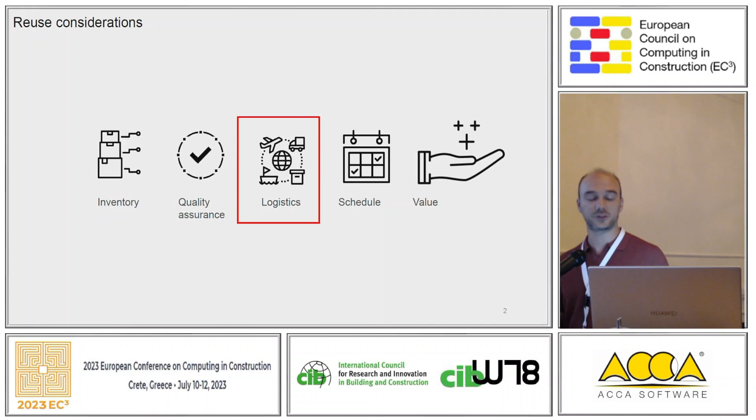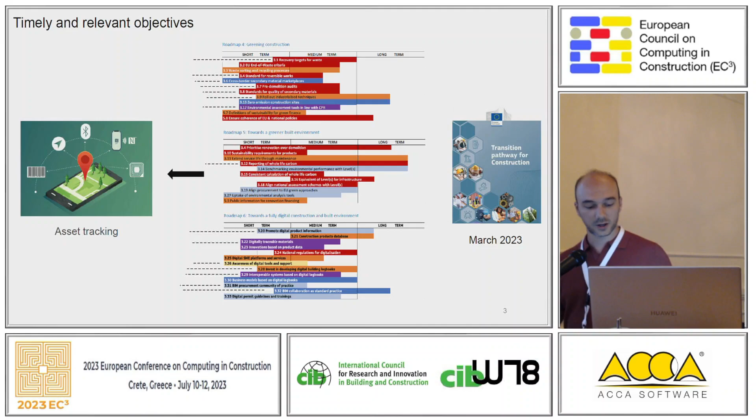The focus of this presentation will be on logistics, but there are many other aspects to consider when it comes to reuse of buildings. This is also a timely and relevant objective relating to the transition pathway for construction from the European Commission, regarding environmental assessment of buildings, digital product passports, and traceability of where these elements come from, since there are a lot of policies aiming to enable reuse.

When it comes to reuse, we also need both tracking and tracing. Tracking usually refers to knowing the type and number of elements, where they are located, and when they will become available. Tracing is important to know information on previous life cycles, the ownership and lifespan of materials, and specifically regarding concrete, the condition of panels and the location history, which can be useful for some LCA modules.

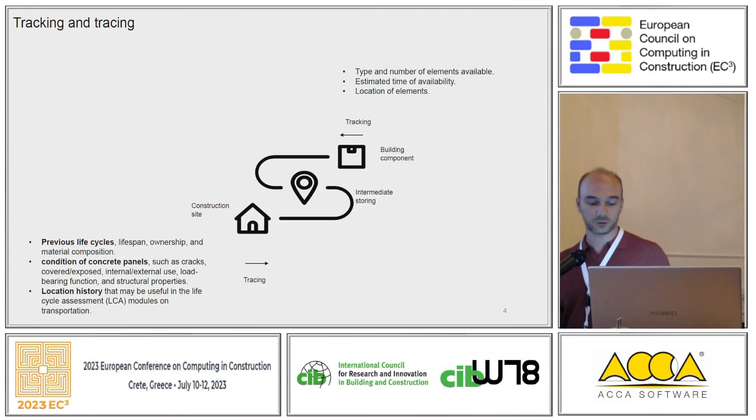Usually companies don't have a model-based approach towards tracking, but they have some internal processes which they use and which need to comply at the country or European level. So they have some identification number, and they mainly use an internal database or existing tools like a spreadsheet or other tools which can be shared or used for collaboration.

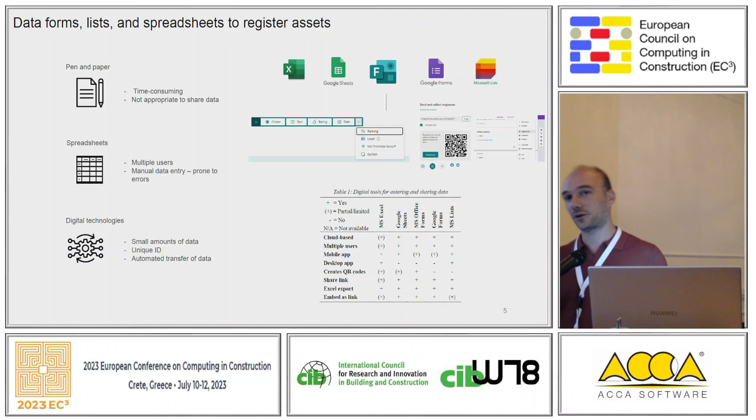This is prone to error because it's not an automatic identification through the database. If we integrate and use digital technologies with a database, we can automatically identify the element in the database, and also use a small transfer of data either in the tag itself or in the database. So the tag can also be used to store some information.

There's a wide range of technologies. The simple one that used to be used, also in these Swedish buildings in the 1960s, is a stamp or a metal plate, which is still in place today and still readable. There's a lot of other technologies like Bluetooth or RFID, radio frequency identification. The difference between passive and active is in the use of batteries, and also the range changes.

Then there's near field communication, which is a subset of RFID. This has not yet been used for tracking elements. There's QR codes, with some work going on either on blockchain or for placing it on elements. And there's barcodes, which is the most simple. QR codes can also be static or dynamic.

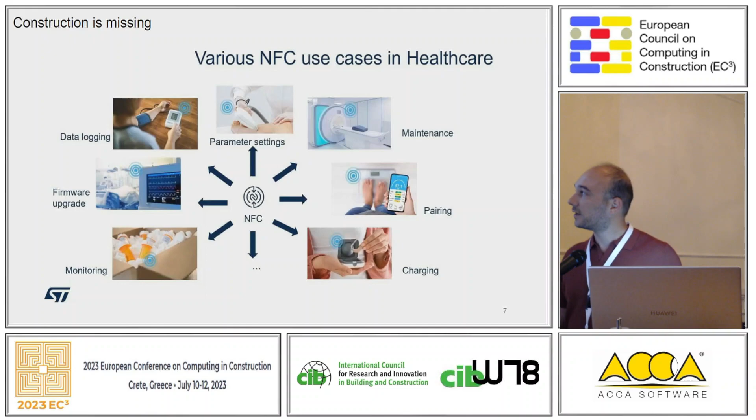The use in construction has mainly focused on using RFID in new construction or for prefabrication. NFC, which is a subset of RFID and also provides secure communication and transactions, can be easily found in credit cards and so on, but this has not yet been applied to elements. So this is something that we're looking at.

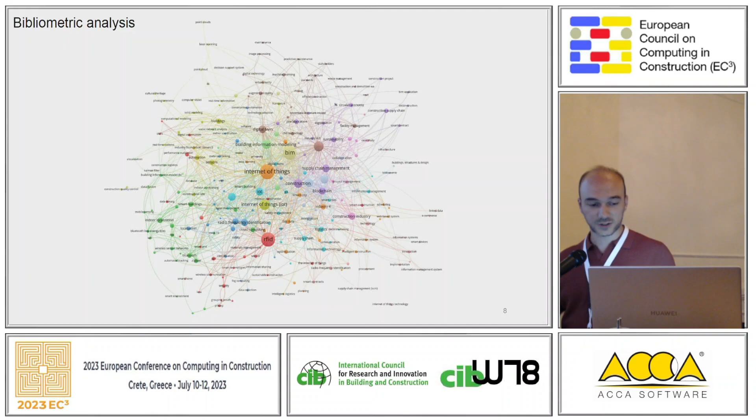From a bibliometric analysis, we can clearly see that the focus has been on keywords like RFID, or the full term radio frequency identification, Internet of Things, blockchain, supply chain, while these other technologies are missing or don't come up in this high-level analysis.

Maybe you're familiar with RFID, but very briefly it consists of three components: a transponder, the tag; a transceiver, the reader; and antennas. It also requires a software application and equipment, so it cannot be used with mobile phones. It can also read automatically a lot of elements at the same time.

Briefly, to show how RFID works, it can be a printed tag or laminated tag to protect it from weathering, or encapsulated tags. These are most commonly used in concrete, for example, because it's in an alkaline environment which would damage it, and this is mainly used to protect the tag.

As I said before, the focus has been on new prefabricated construction, for example in the Hong Kong Housing Authority and researchers, and there's several papers since 2015 in Automation in Construction, mainly focused on RFID and how they're using RFID on this topic.

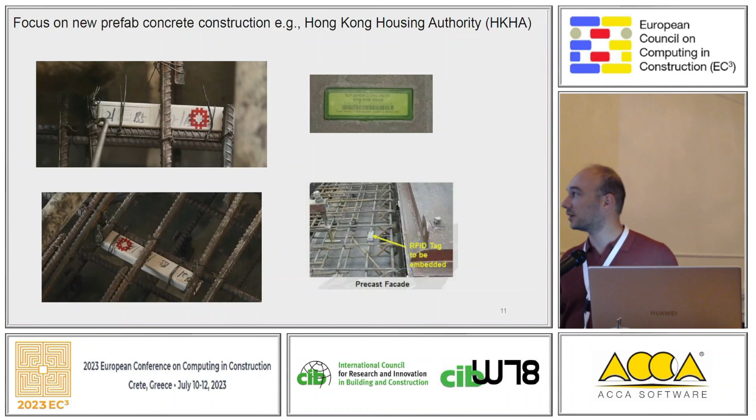There's also some very new interesting developments in Bluetooth that we explored in this paper. Although these are not yet adapted to construction, they could be used because they would enable a decentralized use and sharing of this material and elements, not structural, but also structural, and for tracking them using mobile phones without using antennas.

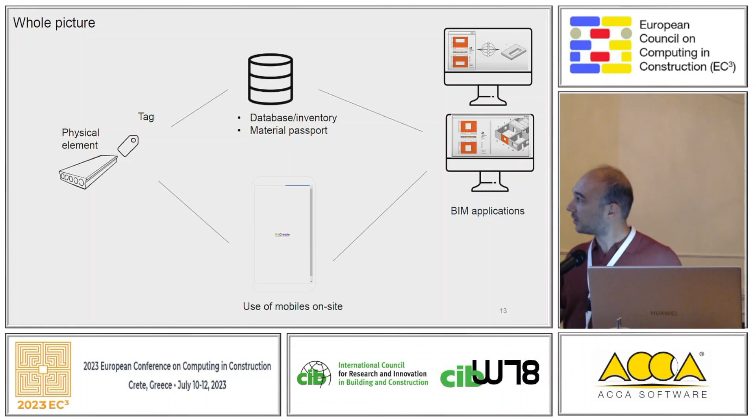So the whole idea of this initial work we are presenting in the paper is to have the physical element before deconstruction, or at some point put it in a database and use of mobile phones, and also link it to a BIM application.

So the first question, which has not been seen in other research, is that they mainly use it on new construction and then the building is there. While in this case it's how do we align which technology applies to which life cycle, because the sides of the panels, once the building is constructed, are not more visible.

The surface is visible when the element is constructed. Then when it gets deconstructed, these elements are again stacked, so the surface is not yet visible. And then they get, again, reassembled into a new structure. These are images from the construction pilot.

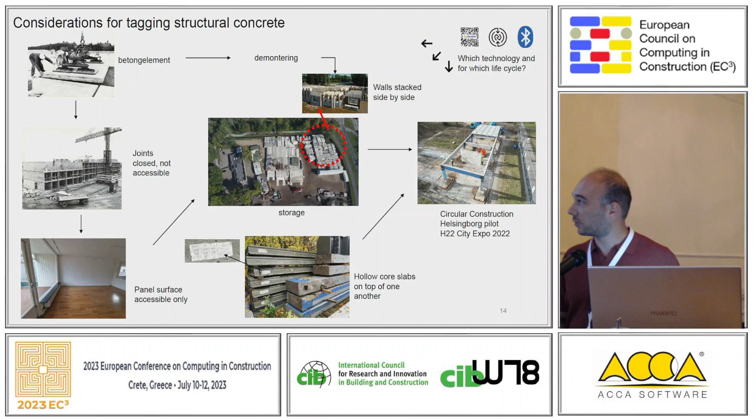So in the paper, we propose a new digital workflow. We are using a face-based Revit family to model the tag and put it in a template or in the model. There are two ways: it could be either model the tag or as a property on the BIM model.

This is a choice, and we are not suggesting one is better than the other, but of course if you have a specific condition from the use or from the existing condition, then we need a more precise location where that element is, either in the type of the panel or in the condition.

And then we place an NFC, the near field communication, and a Bluetooth tag together or separately on the surface of the panel. Then when these are stacked, a QR code could be attached to have this identification.

And then when the elements are reassembled, the higher cost Bluetooth could be recovered, and the NFC could be left for life cycle tracking to have in the existing condition, and also to share information with users to know sustainability aspects of their own building.

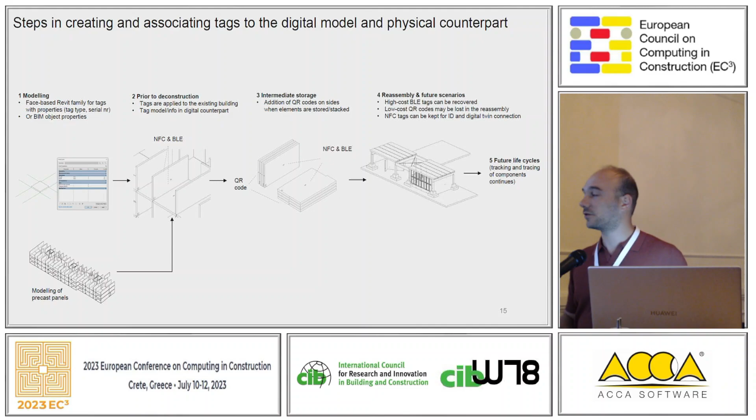But this would also require a role-based access to levels of information: what can be seen publicly, what can be seen by users, and what can be edited.

So the integration mainly explores these three technologies, QR codes, Bluetooth, and NFC, through the use of mobile devices, storing a database which has an image, a location, and the identification of these tags, and also perhaps using a 3D model like Speckle with annotations that we need on the site, or store them directly on the database, and also transfer this information into the BIM model.

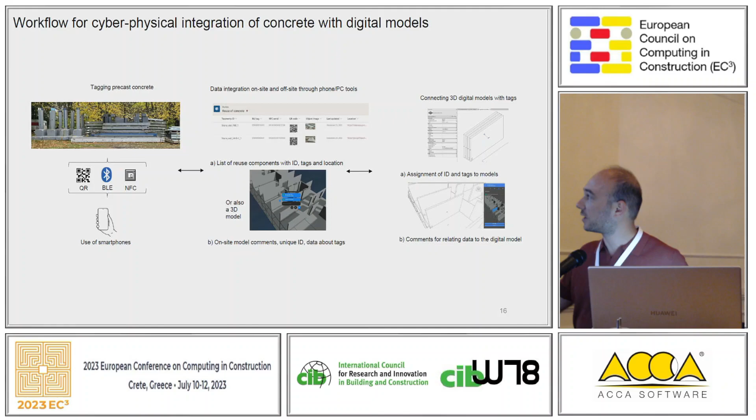There are different element IDs that come into play, and there's the Revit element ID, for example. Each BIM tool has its own, IFC GUID, or there's the global trade item number system, and there's the digital product passport, which is being defined and developed.

So every ID plays its own role, but there's also one ID that we have proposed and developed to track elements, independent from this, or it could be related to this. This is something to be discussed further, because a lot of things are being developed currently.

And why do we need a model-based approach instead of drawings? A lot of companies still use existing drawings today to tag the elements or the materials, while we are moving more towards a model-based construction or deconstruction.

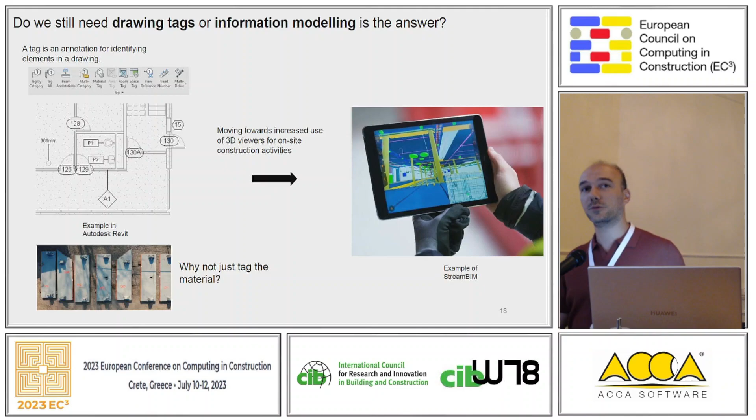So it makes sense to have these elements placed in a digital model and be able to also have this integration of tags in the model.

So we did some laboratory examples to test these technologies. We did some core drills at different depths where we placed an NFC tag, simple NFC tags that can be bought on Amazon, and also sized correctly to place a Chipolo Bluetooth tag. As you can see, also pouring concrete without rugging the NFC, and we had some very positive results.

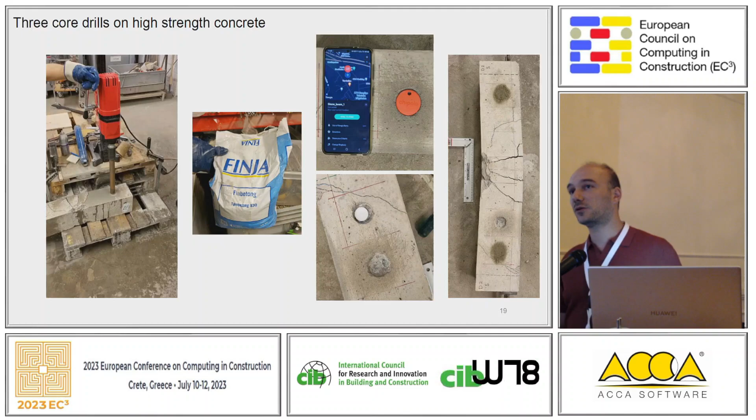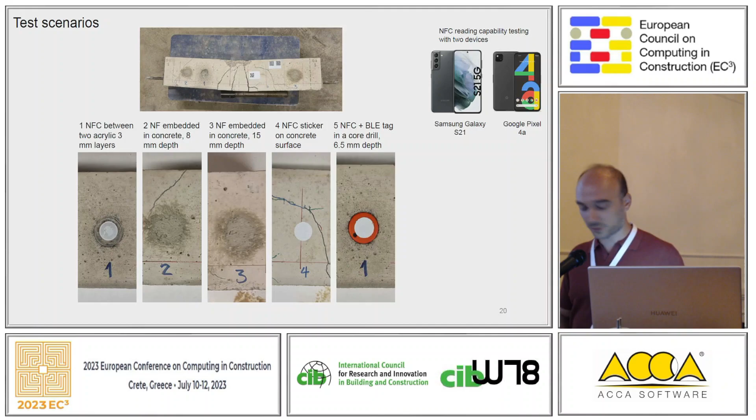Even without rugging, the NFC was readable. These are the 5 scenarios that we tested: encapsulating the NFC between 2 acrylic 3 mm layers, pouring a high strength concrete at 2 different depths, just placing the NFC on the concrete surface, or combining the NFC with the Bluetooth. We tested it with the 2 devices' reading capabilities.

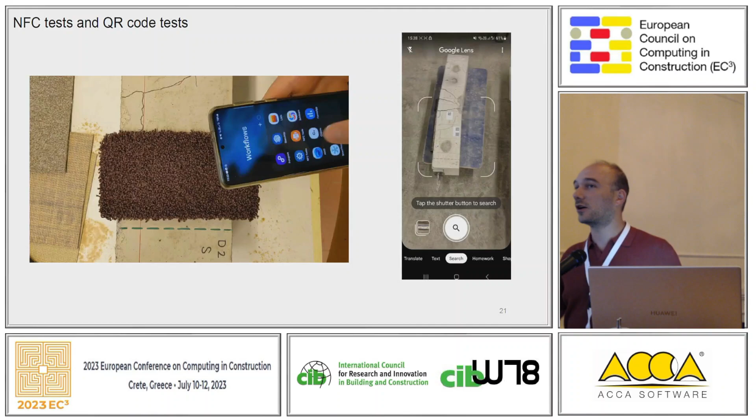This video will show the reading capability for the NFC through different architectural surfaces, because the concrete is not the final surface, and also testing of the QR codes, which should forward to a web page.

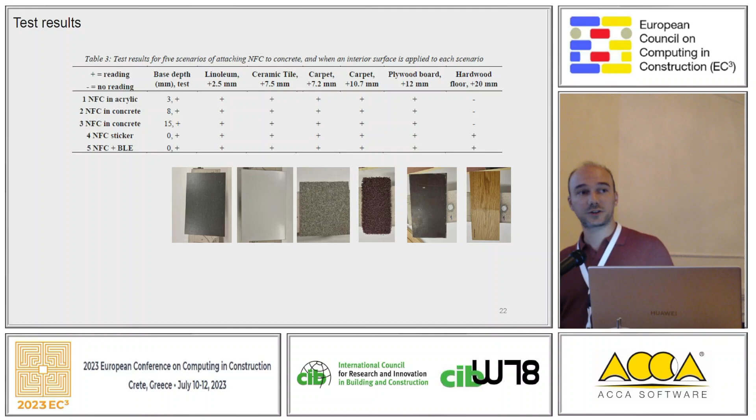These are the test results of different architectural surfaces. The first column reports the base depth where the NFC is placed, and the other columns report the different surfaces: carpets, wall surfaces like linoleum, ceramic tiles, different depths of carpet, plywood board, and hardwood wood board. Only in the last column did we not have a reading capability for this NFC, but there are also NFCs that have higher reading capability which could allow for this.

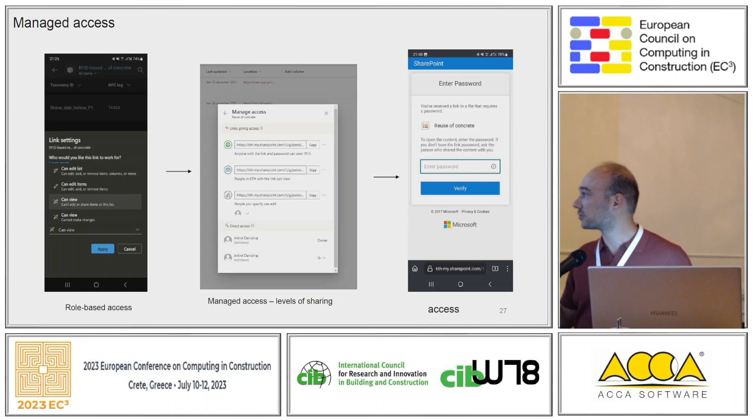Managing access, this is again, in this case, using existing tools like Microsoft SharePoint and Microsoft Lists. And the NFC Forum introduced a wayfinding mark last year.

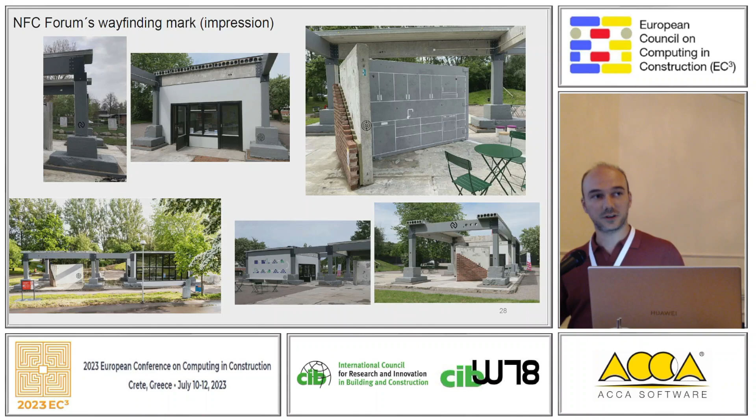These are some impressions of how it would look, and we are planning in our upcoming construction pilot to integrate these things. The NFC forum is also looking at extending the reading range of NFC, but also the applications for it. So this is very timely and interesting, these developments in NFC and Bluetooth.

Also, using more technologies would require more effort, but in some cases, when there's a certain panel that has a certain cavity, maybe there's no need to use 3 technologies, but 1 or 2 would be sufficient. So this is a kind of explorative way of using these technologies to cover the whole life cycle.

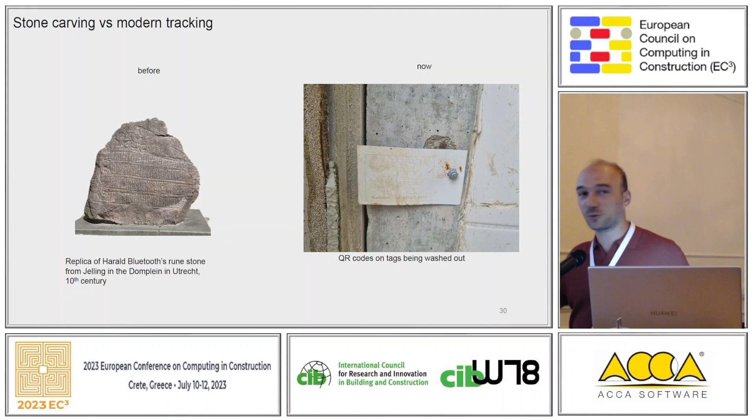And of course, if we want to keep things forever, we should carve them into runestones like the Vikings did. There's no 100% certainty and reliability on technologies—for example, QR codes that have been washed out over less than a year. So thank you, and we are doing some further work. Stay tuned.